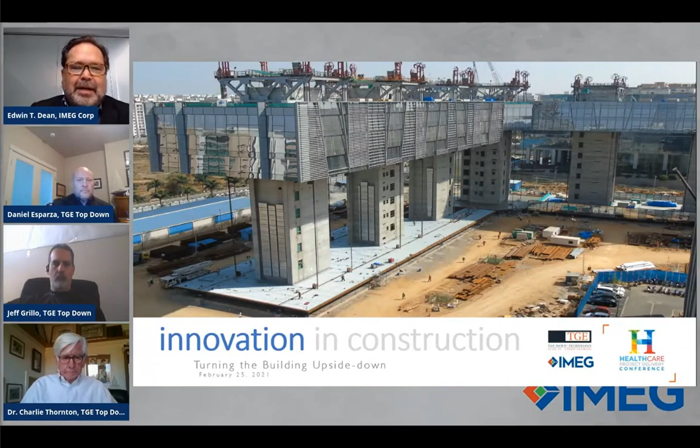I'd like to thank you for joining our panel discussion today on innovation in construction. We're going to be showing you how turning the building construction process on its head is going to save both time and money and bring about other benefits to the healthcare delivery process. We have a panel today to do that. I'm Edwin T. Dean with IMEG. I'll be moderating and leading you through the discussion with the other gentlemen on our panel.

Joining us today is Jeff Grillo with TGE Top Down. Jeff's background is representing a major industrial high-tech manufacturer with a responsibility for billions of dollars of construction annually, and he's going to represent the owner's point of view. Also on our call is Dan Esparza with TGE Top Down. His background is managing general contractors and representing the builder's point of view.

And our third panelist is Charlie Thornton with TGE Top Down. His background is as an icon in the structural engineering community, and he is the founder of one of our nation's largest engineering firms, and he'll be representing the engineer's point of view.

Our next slide here talks about what we're going to discuss, and let me just give you a real takeaway. What I hope you come away from this presentation with, because there's going to be a lot of material at you, is to understand that innovation is transformative, and innovation comes at you not in incremental pieces, but by taking a step back and rethinking the problem and coming up with a unique solution.

I think all of us interact with technology today, and if you think about the technology that we have and what we might have had 20 years ago, you may not have even imagined it. So what you're going to see today, I hope you can see as innovative, because it is transformative and it takes you away to a different place than maybe you've thought about how to do construction and how we can save money and save schedule.

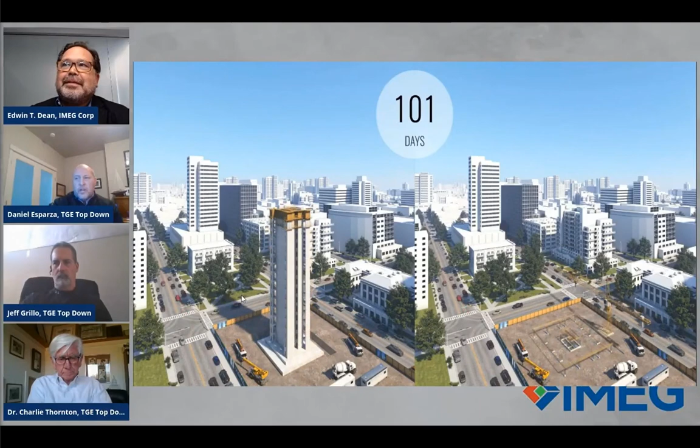This is a representative example of the system. It's kind of a real quick overview. I always say a picture is worth 1,000 words, but this is a comparative analysis of our system, the top-down system, and it's really a lean system, a structural system. And Charlie will speak to the engineering of the core and shell advantage of top-down versus a conventional built system.

And so what we really wanted to do was to start off to show the innovation model and the new technology, not just from an engineered solution, but from a construction delivery model. What we'll talk about today is the lean environment from an owner's perspective, a build perspective, and an engineered solution perspective. The holistic model impacts healthcare and other asset classes, but I think it has a significant impact on healthcare and tall building structures for healthcare, in how we can increase efficiencies with time and specifically cost and sustainability.

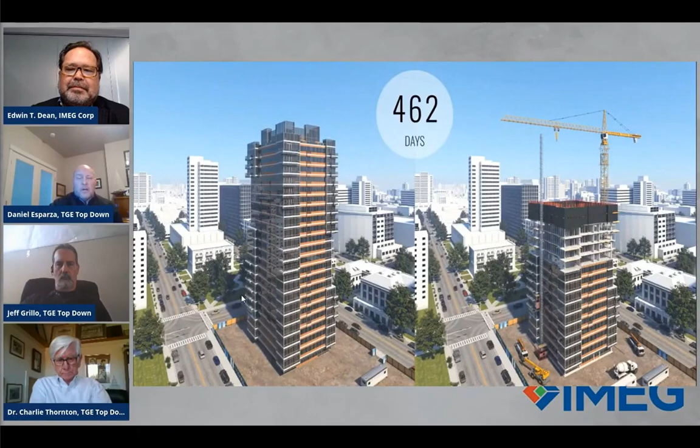We wanted to start off with this, because the comparative analysis captures the entire model. It gives an overview of the delivery model and the process. And so you can see how the build comes together. It eliminates the tower crane. It's a manufactured process at ground level. It's built basically in compression and shear on the core, and everything is a structural design system that is core focused. We'll talk to the engineering aspect through Charlie's presentation, but really wanted to focus on the comparative analysis and how the build comes together.

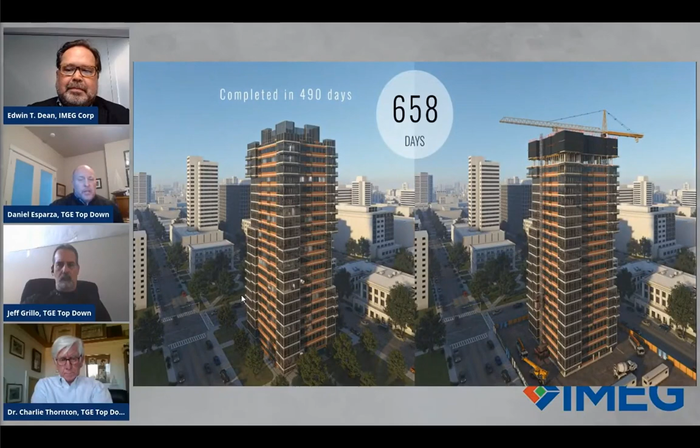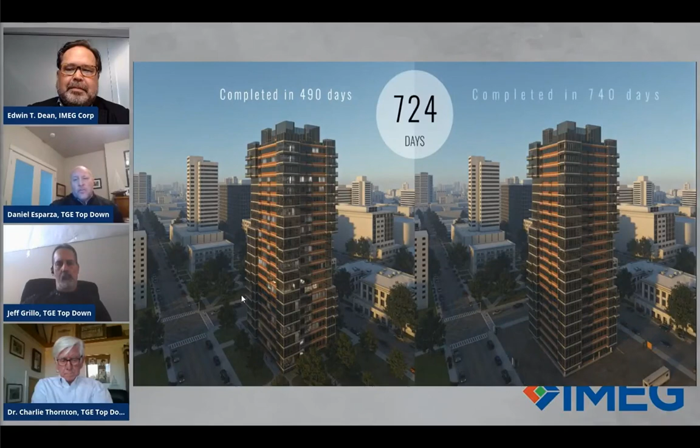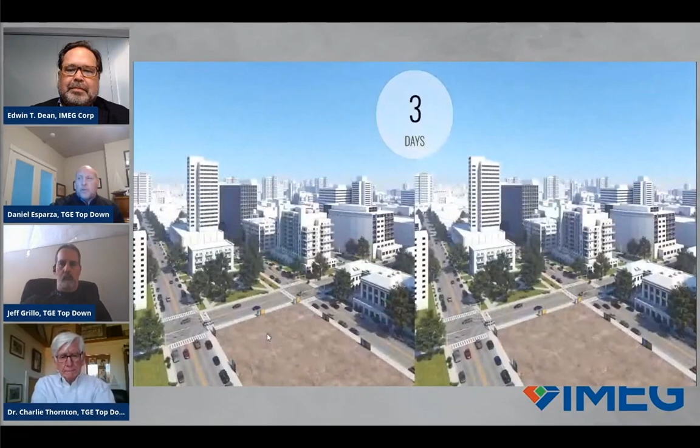So I think this is a representation that speaks to that at a high level, and then we'll dive into the weeds throughout this presentation. This gives an overview of the technology from a delivery perspective as a building model. A previous project that we completed in the commercial space is represented in a project that we did in the commercial lab office.

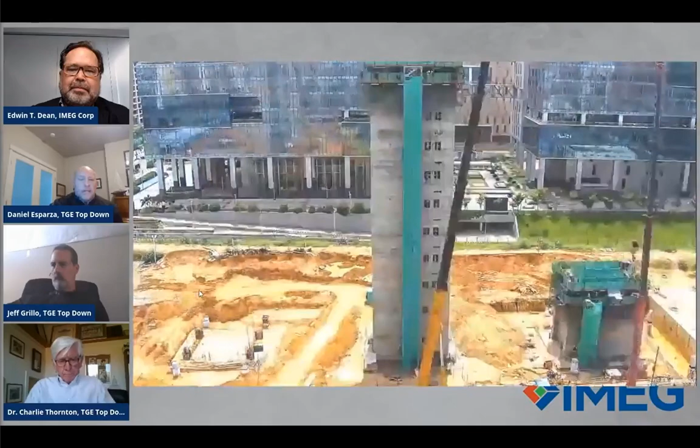Which was done, this is a 624,000 square foot, 10-story lab office space. And actually, Jeff, in his presentation next, is going to go through the metrics on this build. But this is a turnkey operation from a core and shell. This was completed about 2 years ago for a major Fortune 500 client, and the metrics on this we'll talk about here in a little bit.

But again, core development, core and shell, compression and shear on the core, and everything built at ground level. This was an internationally built project. Some of the project items that we would do domestically here in the U.S. would be a little bit different. But again, a more manufactured build, everything at ground level, roof construction built first, strand jacks at the top, and on a very repetitive basis.

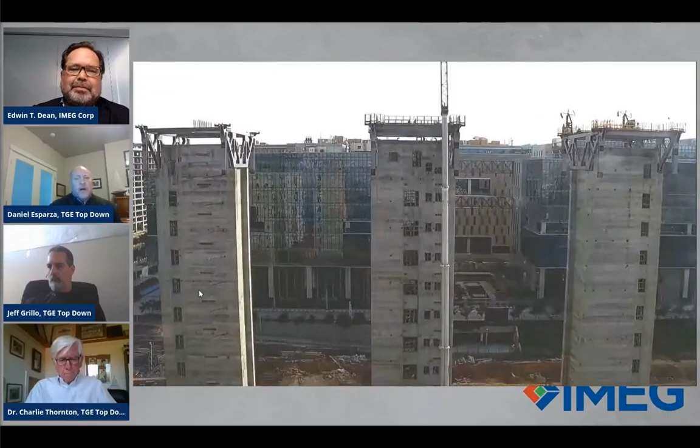And so what we're looking at is decreasing the scheduled time and a vertically integrated supply chain. We're really changing the innovation model from the design application to the build application and bringing that to a turnkey process. As you look at how projects are taking longer, especially in healthcare, I think the complications in projects, as you go taller, buildings become less efficient. We're looking at more innovative strategies, a learning environment to look at things differently. We want to make sure that this type of building application gets some better visibility.

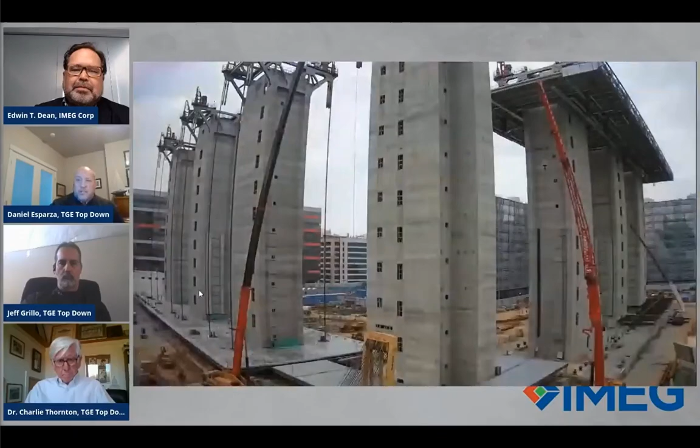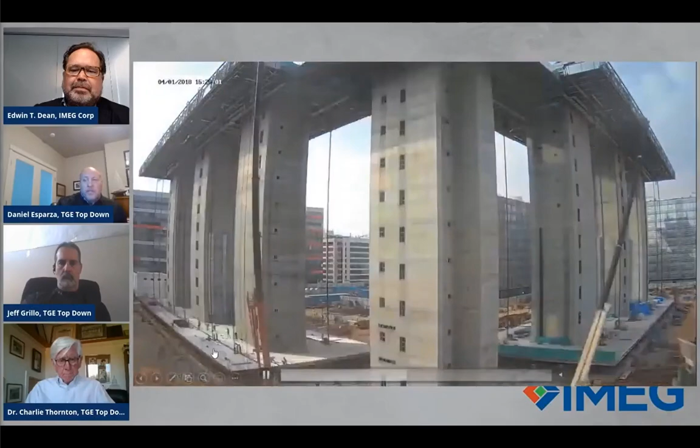So with this project, again, 624,000 square feet, 10-story build, a very manufactured building process at ground level. We'll talk a little bit more about the building applications in a little bit, but wanted to give a real world, real case analysis of the structure as it's developed. A lot of manufacturing and prefabricated elements go into this build, and we are able to capture those efficiencies of on-site, off-site construction, and the industrialized process that goes into the build.

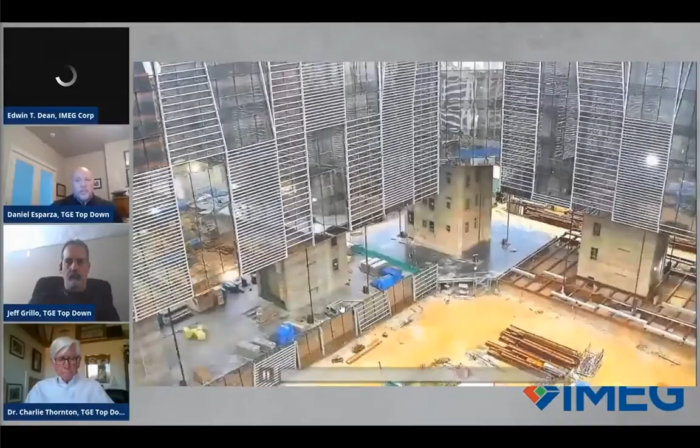So we can interplay that from a design, manufacturing, fabrication, and construct model. That's all vertically integrated into the process of a top-down delivery model. Those are the innovation processes that we're wanting to present as a new technology delivery format, and provide a little bit more visibility on the technology in the construction space, specifically for tall buildings, and how we solve some of the current challenges in the market on complex projects. So with that, I'm going to turn it back over to Jeff to talk a little bit more about some owner applications in the market and where the industry performance metrics are.

Jeff, you're muted. I will start once again.

Thanks, Ed. So as an owner, we used to call this either what we could buy from the construction industry or what our challenges were in the construction industry. In the upper left is the productivity, which comes out of BLS, and unfortunately what I represented inside the owner was construction, which was one of 3 negative productivity businesses over the last 60 years. But I worked for companies who were on the top of that curve, so they couldn't understand why we were getting no productivity gains in the industry we represented. Over on the upper right, we tried every contract method known to mankind. We got incremental improvements on some of them, but claims and delays were a continuous problem.

On the lower left, you can pick up any construction industry literature and see that the bigger the project gets, usually the further behind it is on being completed, and the more it is over budget. We experienced this over and over again. Our companies expected us to be very predictable on what our cost and time was. Unfortunately, the industry doesn't deliver that. And on the lower right, in most industries you have to innovate, which means you have change during your design and construction. The construction industry is extremely inflexible to pick those up and incorporate them without large impact. So these were always the big 4 challenges we were looking at: how do we go solve them. Go to the next page, Dan.

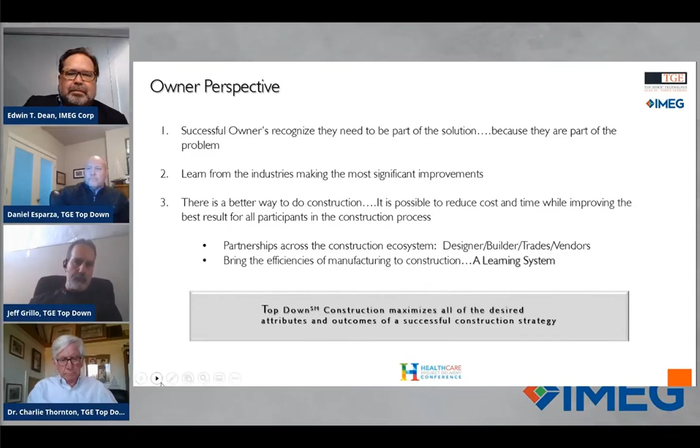So Dan just showed you the video. I'll walk you through a few of the metrics of the projects here on the next page. So we started this. We had a traditional design done. We went out and bid it. We were floored when we got the cost. The project was in Bangalore, India. We were just looking at this modularization and how do we go improve it. We met Charlie. We decided we were going to give it a shot. We did building one. This is what we call our innovation 1.0.

At that time, the building had been built, I believe it was about 40 years, Charlie. So there was some time to sort of dust it off and bring it up to the current construction efficiencies that were out there today. We went off and did that. We ended up completing it in less time, even though we had to do a ground-up design on it and build it. We were still less time than if we had kept doing the traditional path we were on. So we went from a 30-month construction down to about 20. And we took about 20% of what we call the total value out, and I'll cover that in the next page.

The company couldn't believe it. We actually finished it a little earlier than what we told the company. We were actually below budget. It had been years since we had a project that turned out that way. To the point they decided we were going to go build another one. We turned around and built the second one.

On this one, we got the full cycle time down to 20 months from design through people moving into the building. And we were 40 months on the traditional. So our initial goal was to cut it in half. We did cut it in half. And we got about another 5% cost efficiency out of that one. And I think we've ended up with a list of items, and on the next one, we'll be able to repeat that.

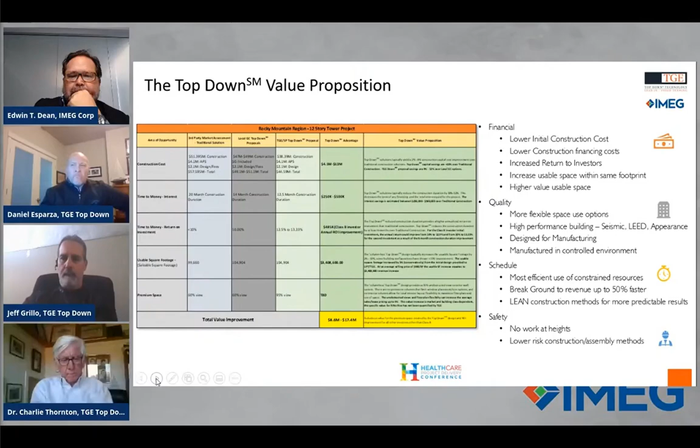So again, as an owner, this was one that checked every single box. We got predictable. We had continuous improvement. And it was continuing forward. So it got to the point where we decided we were going to get out of the office building business for a while. And so my testimony on how this works is I decided then it was time to leave Intel, and that's how I joined Charlie and Dan to form TGE. So it's truly a building system that from an owner's point of view checks all the boxes. And I'm going to turn it over to Dan, who's going to walk you through the construction.

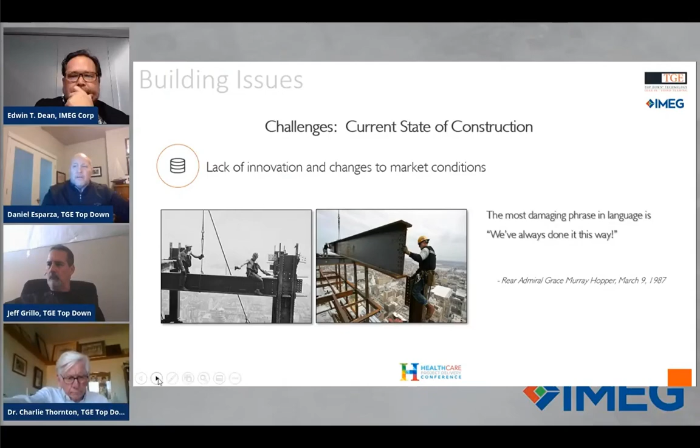And what top down is able to do from our building technology is really address a lot of the challenges that I think the current state of construction is in. Capital projects are taking longer, they're costing more, and that's a consistent trend year over year. And the challenges for tall structures, as the height increases with 30% less efficiency on the structures, we're really focusing on where those current state challenges are really impacting the build. Not just with the inefficiencies of labor, and the inefficiencies of supply chain dynamics, safety, quality control, the ongoing challenges that the market continues to be plagued with.

And those are the things that I think top-down excels at because of the predictability and the lean nature of how we brought the building process together, but the engineered delivery of the building and then how the building is actually delivered.

So I'm sure a lot of the folks here on this are well versed in what the challenges in the state of construction are. But again, they continue to rise on a year-over-year basis, and we're not improving. And I think Jeff spoke to that in terms of the slide earlier about where our industry performance is really not gaining any advantages. We're getting some technological advantages in terms of some software, but we're really not changing how the building gets built. This is a truly revolutionary process in terms of how we can change the advantages of core and shell and lean out material by mass.

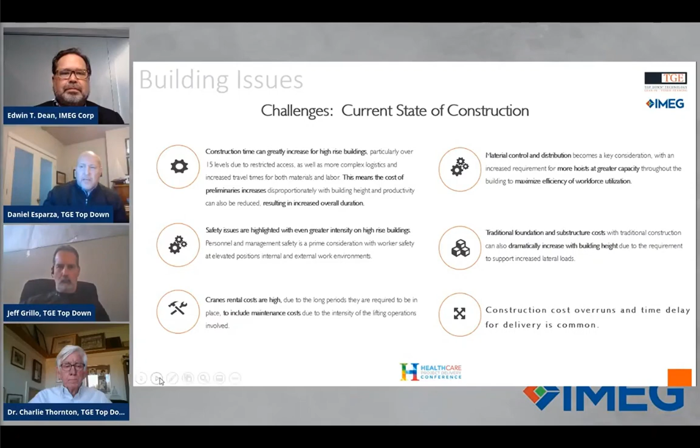But I think from a building process and how we learn as builders, in Lean and Last Planner and the application of building this as an integrated building supply chain process, all of the advantages come from top down because it's a delivered engineered solution. We're eliminating a tower crane, which has a huge cost impact to the project. There's no retooling of trades. It's all standard application of the delivery model.

We can erect a standardized floor plate at ground level and continue that one floor at a time. And that repetition of standardized trade process increases that productivity and efficiency. Whether it's the on-site application coupled with the off-site industrialized workflow, that creates a very lean environment. And so the predictability of the deck time and cycle time of that deck raise for us is a very standardized process. And I think Jeff spoke to it earlier in terms of the performance, that learned application of picking up 10 months on SRR3 and SRR4.

And so for complex projects like healthcare, those realized benefits can be gained on a real-time basis, on an application that's not subjective. They're measured, they're quantifiable, and they can be dealt with in a planned percent complete application that is very real with your vertically integrated supply chain to know what those metrics are. And so, from all of these, floor level construction, you get some really true time savings.

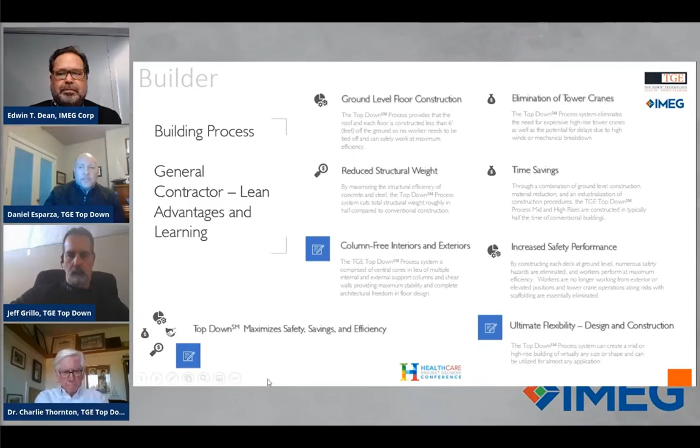And so those are the maximization that we really look to in terms of performance for a learned process for top down. And so those advantages, I think, are really applicable to how a lean application coupled to a design build solution, or an engineered system, really achieves better maximum value. And as a builder, you're able to execute more program work, it becomes more efficient. And so I think the trades gravitate more to it. Again, what's new is always difficult for our industry as a whole to gravitate to, but I think it is catching on.

So what we're excited about is all of the benefits below. The superstructure represents about 40% of the material by mass, or I should say the embodied carbon. And when we can reduce that structure by 50% of material by mass, we can reduce that embodied carbon footprint. And so the building, by definition, is a more sustainable structure. So the ESG footprint is substantially improved.

And so I think the benefits overall for the structure are a better time to market, cost footprint, and a more sustainable footprint. So all of those things coupled together from a delivery standpoint, as a builder, you're able to provide a better product. It's a more sustainable build. It's a more flexible and efficient structure.

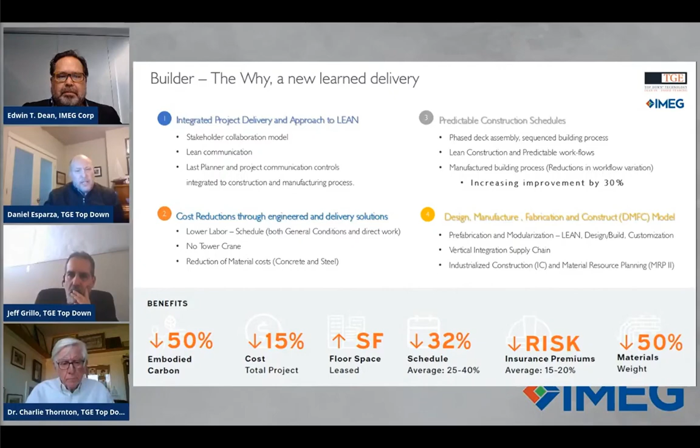So I won't go through all of these points. I know that this presentation's a short duration. I want to get to the engineering elements because that's the key basic point. Without the engineered solution in core and shell, you're not able to deliver it with that jacking system, because the jacks make it what it is. The jacking system is how you get it up and have no columns.

And that's fundamentally the process of the build. For healthcare and integration, a lot of what we do, and I'd be remiss if we didn't add this element to it, is a lot of the vertical supply chain is prefabrication. And so when the decks are constructed at ground level, we integrate a lot of modularity to offsite fabrication and offsite production. And so as the deck is a structural deck element, we floor load that for fit out.

And so we have a supply chain partnering relationship with a number of companies that are focused very specifically in the healthcare space. We do work with Blox on some R&D that we're doing. And we also work with Falkbuilt that does some interior demise space for headwall and bath systems and panelized systems for interior fit out.

Those systems really allow us to build out inpatient and interior demise space for healthcare, and so that allows us to provide that healthcare layout. That system for healthcare is incredibly flexible on interior space planning, and without columns, that flexibility increases exponentially from a design perspective, both architecturally and structurally. So a lot of that floor plate becomes a pretty diverse element with how healthcare planning works.

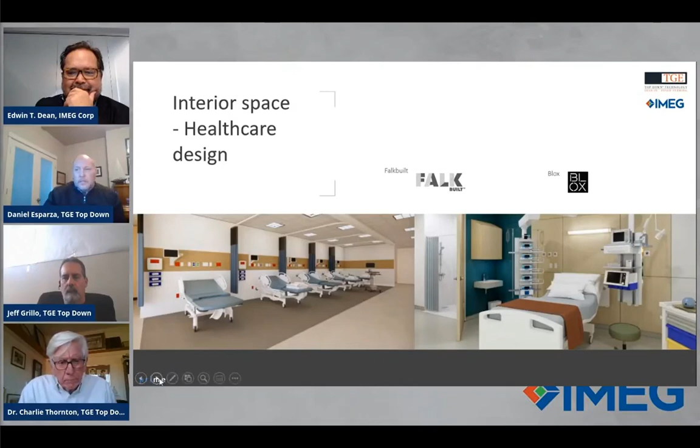So, the next slide here. I kind of want to go over this very briefly. We talked about a lot of this, but I think the core element here is this side of the slide, which is the entire build is a structural element. Without the inherent design of the structural engineering on core and shell, coupled with the delivery mechanism of the building application and the vertical supply chain of how this comes together, you have a complete system.

But again, it is a learned system because everything is in compression and shear on the core, and there's no net uplift, no columns, and it's delivered through this construction methodology. You have a complete delivered system. And so, getting the entire supply chain of the construction apparatus from design and builders, and especially subcontractors, which the TGE team is obviously engulfed in, is a truly unique and innovative solution to providing a core and shell strategy. We do that for all asset classes, but healthcare definitely is a vertical within that delivery process.

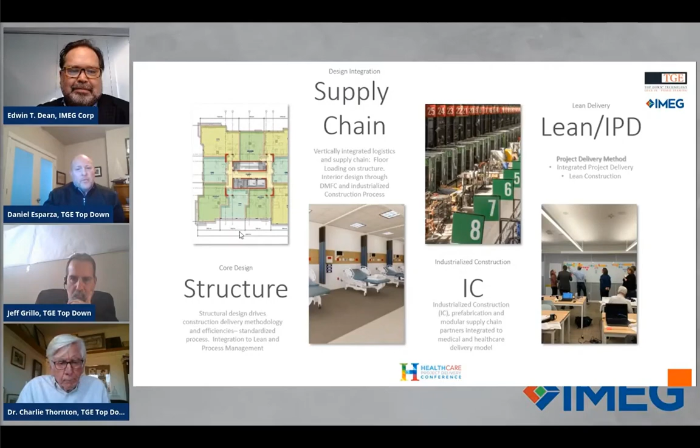As projects become more complicated, and they shouldn't be, our initiative and focus has always been to lean it out, because we're going from design to manufacturing to fab to construct. And that process is a very simplified process because of the standardization of the build. This innovative strategy really allows that to take place at a more standardized basis. So we're happy to help with some learning on this and introduce more of it to market. With that, I'm going to turn it over to Charlie and let him talk about the inherent structural system of top-down.

Historically, this system was first used in California in the mid-1960s. Four buildings were built in the Bay Area. One was built in San Francisco. One was built in West Virginia. And the last one is where I got involved in it. It came to New York City. All those projects are on our website. So we've sort of rode the cycles.

In 1972, the inventor came to New York to build a Russian mission to the UN in Riverdale, New York, and then the Arabs cut the oil. So I bought into the system, went to Moscow, Saudi, and Iran, and started designing these buildings in those places. Then the Russians invaded Afghanistan. Jimmy Carter pulled the plug on our 15 projects, and I bought Thornton Tomasetti from a publicly traded company and didn't really look at this until approximately 2005.

Our big luck was getting involved with Intel, met Jeff, met Dan. We did the two projects. At the end, Dan said to me, and Jeff said to me, "Can I join you? This thing's going to take off like a rocket."

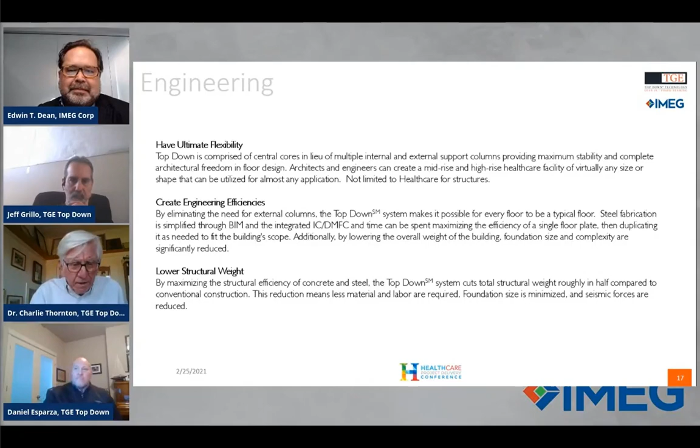The whole building is like a big monkey bar connected together, and the loads go in ways that structural engineers have never seen loads go. They don't go up, they don't go down, they go both ways. So it's really a special system. And I'm going to leave some time for questions because Dan and I can go forever on this. Everything we're saying is pretty much on the website.

Oh, we took a shot at Jefferson in downtown Philadelphia, and we did a scheme with Suffolk Construction out of Boston and now Philadelphia. Then we went to Mass General in Boston, and we did another scheme. And we're now looking at a whole bunch of different projects.

I mean, Intel was 90 by 300. That's exactly the dimensions of a typical hospital with a 90-foot width. Doesn't have to be. And that was 13 pounds of structural steel per square foot. And when we closed the deal with Intel, I said it's 13 pounds a square foot. They said it better be. And it was, exactly.

Hey, Charlie, we've got one question on the line here: is the design of the floor plate limited, or do you simply build more cores? Intel was 7 cores. Edmonton, Canada is 1 core. Wauwatosa, Milwaukee is 1 core. Rhino Rise and Evolve in Denver are 2 cores. Dan and I added it up yesterday. We got $1 billion worth of work in our pipeline.

No hospitals yet. Yeah. The core dynamic is going to be dependent upon, obviously, floor plate and cantilever distance, and that's really the only constraint: your cantilever distance and the layout of the requirement, and then live and dead load analysis. The constraints are dependent upon design, but in flexibility and utilization of the design, anything you can build conventionally, you can build with top down.

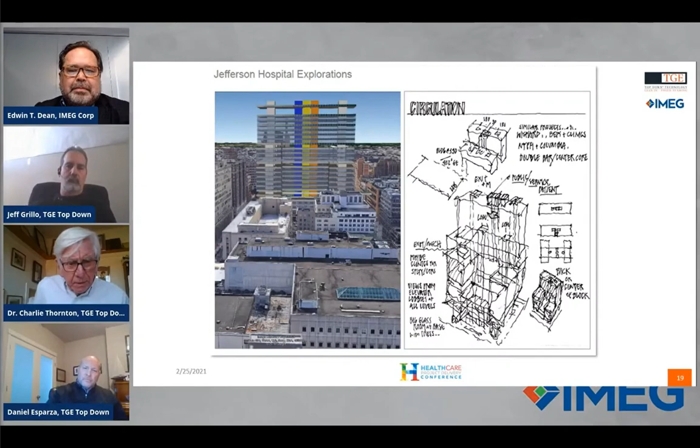The only constraint is location, where you want to put the core, or is there a core constraint? And what is your cantilever distance, or edge of deck to face of core? Let me give the cantilever dimensions, okay? In a hospital, it could be 30 feet, it could be 35 feet. We have solutions for that.

In office buildings, it could be 45 feet. In residential buildings, high end, 25 to 30 feet. Middle, 18 feet. Student housing, 15 feet. It's all about keeping the cantilevers reasonable, keeping the core reasonable. But it's a balancing act by the structural engineer who's designing it, because you've got to find the balance between the size of the core and the size of the cantilever.

And we go through about 3 passes, and we get it within about 5% of the quantities after about 5-10 days of work. It's so predictable. The other thing is the core is usable space as well. So it's not limited. It's not non-usable space. The core can be utilized as interior space planning.

We've got modular hospital designs. We've got a deployable 56-bed hospital that you can put on a barge and send anywhere in the world on the waterfront. We don't stack modules, we slide them onto the floor. Stacking boxes is the stupidest way to build a building, because after you stack 16 boxes, you've got to put a 5-foot thick slab at the bottom of it to hold them all. We slide it right on the floor.

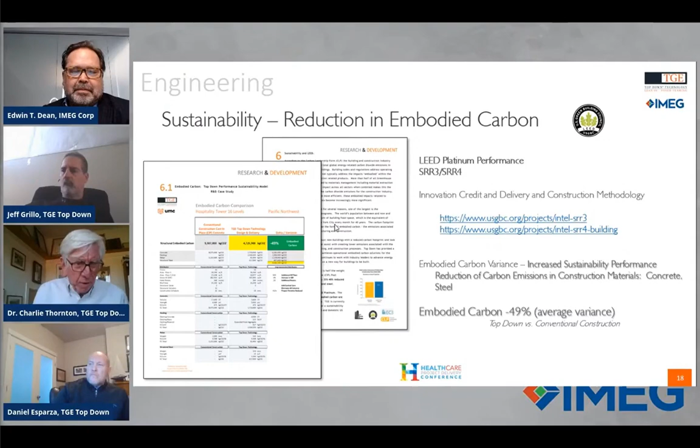We've got high rise. We've got one design in Chicago that's 100 stories, and there's no net uplift on the core. That's amazing. I'm working on a study of what could have been done at the World Trade Center, and we're using TGE to design a building that if we were in a position to rebuild it the way it was originally, we could do it, and guess what? It wouldn't collapse. Very flexible. Any more questions?

Say, Jeff, one of the comments you made, change is often difficult to accept, and I think that's probably more so in the construction industry. Can you comment a little bit on how, as an owner, you were willing to accept this change and take on this opportunity? It was really driven by need. Sometimes you get pushed into it, but the companies I was working with, because they were innovation type companies, we were pushed pretty hard, and it came down to like any decision you make.

We looked at the risk first, the benefits, and a lot of it came down to Charlie Thornton, right? We looked at it with our internal people. We had our own internal structural people, and some of those said it wouldn't work. And I said, if the guy who did the engineering for Petronas and Taipei Towers could make those stand, I'm sure he could make this stand.

So there's always those naysayers inside the company, but when they saw the benefits of truly doing construction in half the time, and the business groups were always complaining about their labs, around vibration limitations that we could give them on multi-story buildings, and the use of the space, the columns, how we could set their labs up and so forth. So when we lined up all the benefits, the benefits just outweighed the perceived risks at the time.

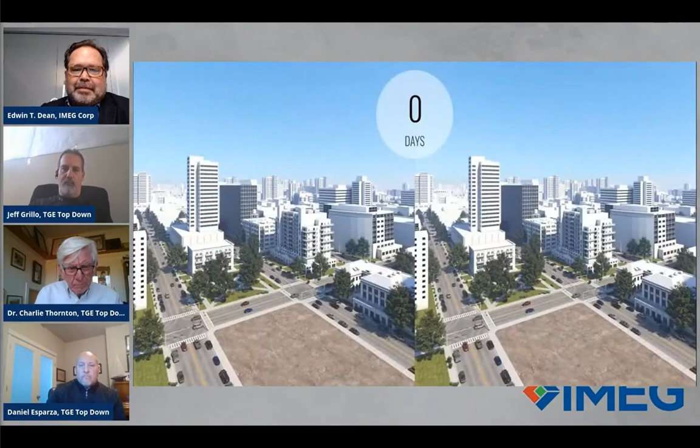And for us, the risk item was a much bigger category because, like Charlie said, it hadn't been built in 40 years. It had been done, but a long time back. It wasn't that it was going to be structurally infeasible, but could we adapt all the latest technologies like pumping concrete, slip forming, some of the latest methods around steel and CNC? We didn't know if we could get all those benefits.

It's now been empirically proven, so from an owner's view at this stage, the risk is greatly diminished because the empirical proof is there. The benefits continue to increase, as Charlie is continuing to design a platform and portfolio on how to expand the use of this. So I think that was it, Edwin. It was really just the benefits versus the risk.

I'm going to tell everybody what you said to BK, Jeff. If it doesn't work, fire me.

I'm gonna answer a quick question that I see on there. How are the floors lifted? So on the screen right here, what's on the top? There's no tower crane. So instead of jump forming the cores, we slip form the cores. So cores are slip formed at one time, so they're at final elevation, and we attach strand jacks at the top.

So at the top of this, it's kind of a tough picture to see, but strand jacks are fixed at the top of the core, and then you have a cable that's run down to the bottom and connected to the deck plate. And so that's done at the top of every core. These jacking systems are affixed to the deck plate, and then they're jacked. And so this jacking system raises the deck.

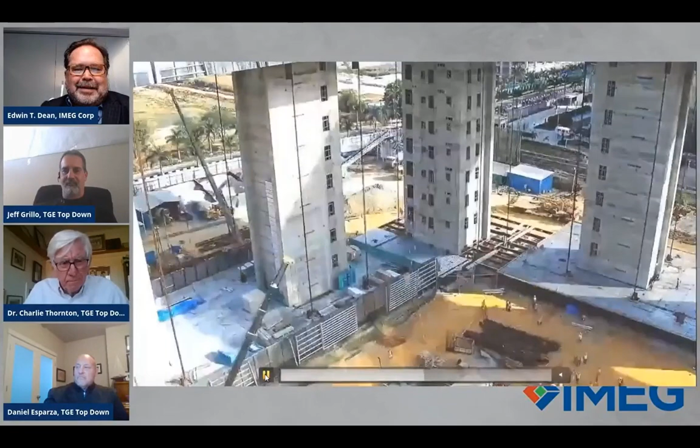Sorry. Talk to a contractor. Do you get any help from an engineer when you need help on means and methods? No, they won't touch it. Talk to my son, who just finished the Las Vegas football stadium. Enough. Thanks, Charlie. Well, I get passionate.

Hopefully you can come away from this presentation, as we wrap up here, with a feeling for the innovation and how this is a totally different perspective on how to look and build, and the savings and advantages that can come from it.